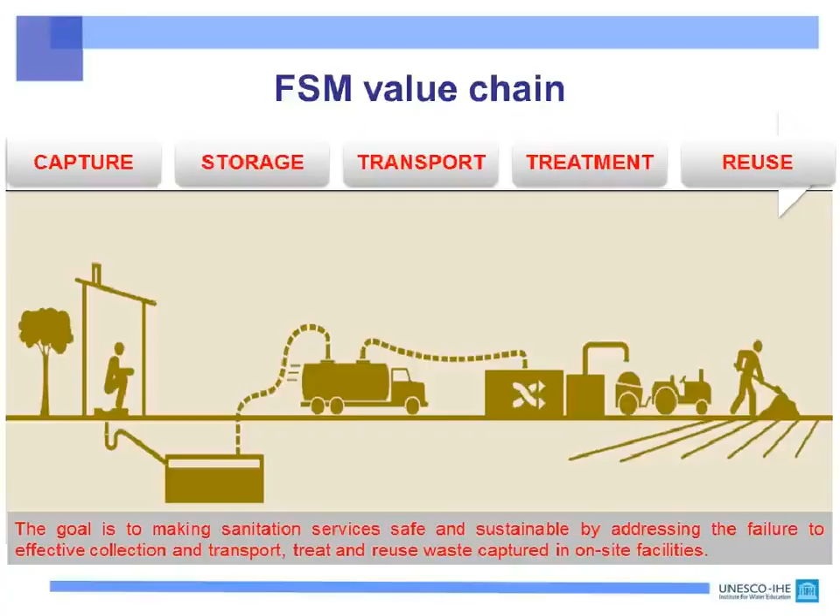For this lecture, we will talk about fecal-sludge treatment technologies. I would even say fecal-sludge pre-treatment technologies. Why pre-treatment technologies? Because we realized that after the processing by drying bed, by settling tank, by planted drying bed, we realized we need a post-treatment. It is why I prefer talking about fecal-sludge pre-treatment technologies.

For an hour and more, we'll talk about drying bed, about planted drying bed, and about settling-thickening tank. What are the main mechanisms we have in these technologies: in settling tank, in drying bed, and in planted drying bed?

We realize that many treatment systems for fecal-sludge are based on systems for wastewater treatment and treatment of wastewater sludge. This is a big mistake because we realize that fecal-sludge and wastewater are not the same. I will talk a little more about that in my next slide.

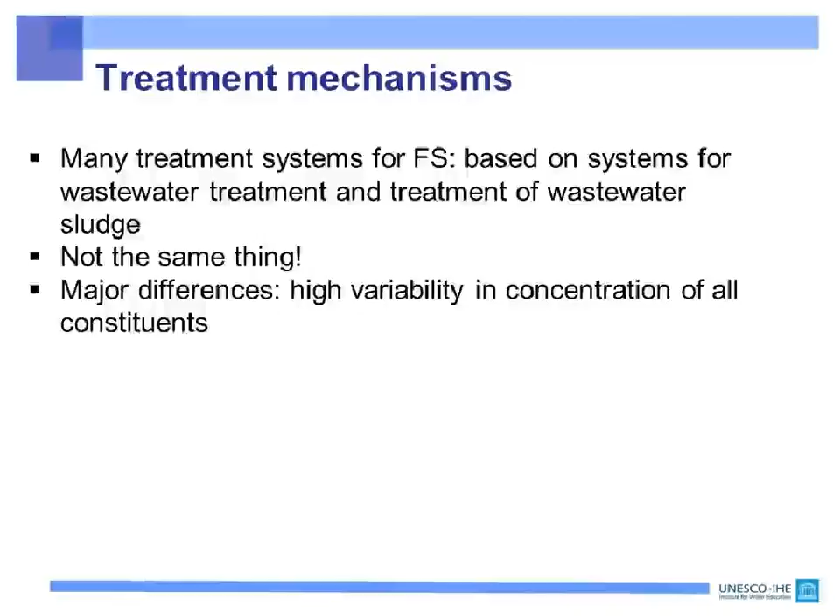We can find major differences between these two kinds of waste due to the high variability in concentration of all constituents. Fecal-sludge is very different from wastewater in terms of volume, concentration, and therefore in terms of charge. Several analyses and measurements made in several countries allow us to understand that 1 liter of fecal-sludge equals 100 liters of wastewater.

It means you cannot use the same system to treat fecal-sludge and wastewater. The design of a fecal-sludge treatment plant needs a lot of analysis due to the high variability that characterizes fecal-sludge. Both within a country and between two countries, you realize that sludge varies widely.

You cannot use, for instance, data from Ghana to design a fecal sludge treatment plant in Dakar. This is a mistake. For instance, in Ghana, where you have public toilets, you realize after measurement that fecal sludge is very different from a country like Senegal, where facilities are residential and consist of septic tanks.

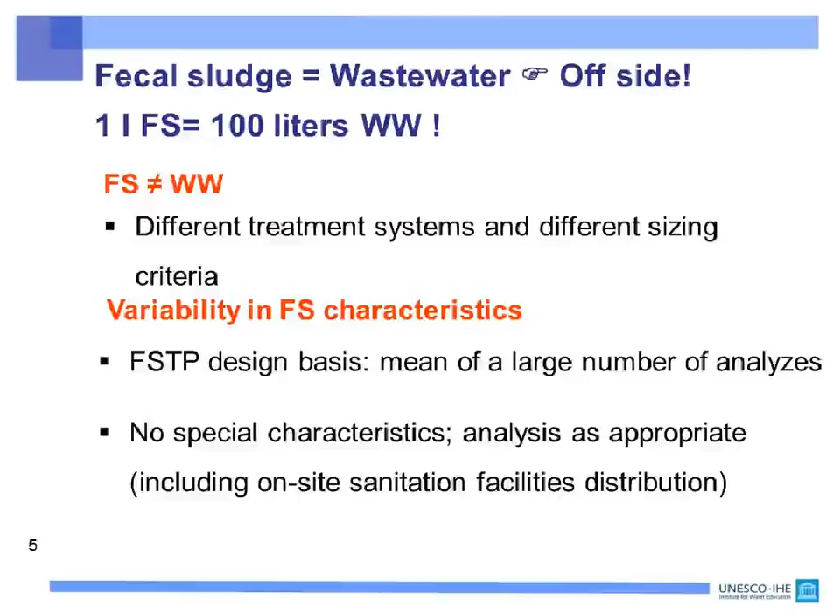Fecal sludge management characteristics depend on several parameters, and depending on the technologies used for collection and transportation, sludge can vary widely. If you want to implement or design a good fecal treatment technology, you have to keep in mind several parameters. I'll talk about the degree of stabilization.

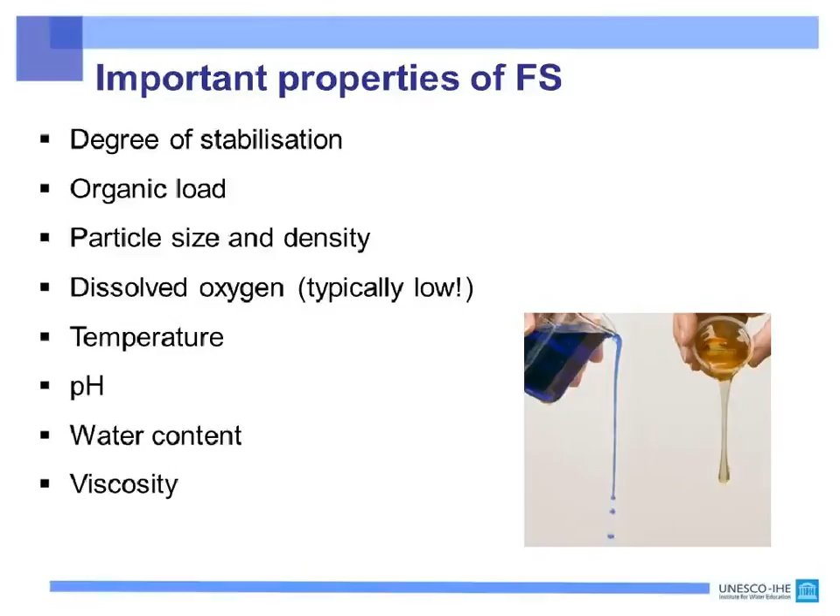You have to link this to the kind of facilities at the household level, because whether you have a latrine or a septic tank, the degree of stabilization will be very different. The organic load is also very important, because it can inform about the kind of post-treatment we have to implement after the settling tank and the drying bed. Also, the water content is very important, because it can inform about the solid-liquid separation treatment needed to improve the quality of this water.

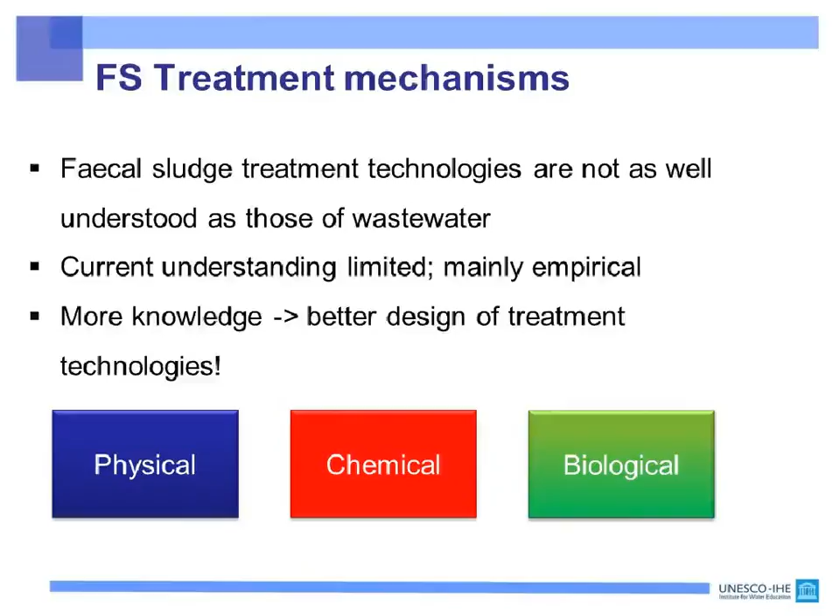Fecal treatment mechanisms are of three types: physical, chemical, and biological. We must know that fecal treatment technologies are not as well understood as those of wastewater. The understanding is very limited, and the design of this technology is based mostly on empirical data. This is why we need to gather more evidence for fecal treatment plant design. Fortunately, several international institutes like EAWAG, the Swiss Federal Institute of Technology, IHE, AIT in Thailand, and utilities like ONAS work on this in order to get more evidence for the design of fecal sludge treatment technologies.

About physical treatment, what is the objective? The objective is just to allow solid-liquid separation in order to reduce the volume of water. This leads to a dewatering process, because dewatering is very important in fecal sludge, since fecal sludge has more than 95% water content, and you cannot dump this waste with this water. This is why the first thing to do is dewater, and this can reduce the transportation cost of the waste. When you dewater, you also disinfect.

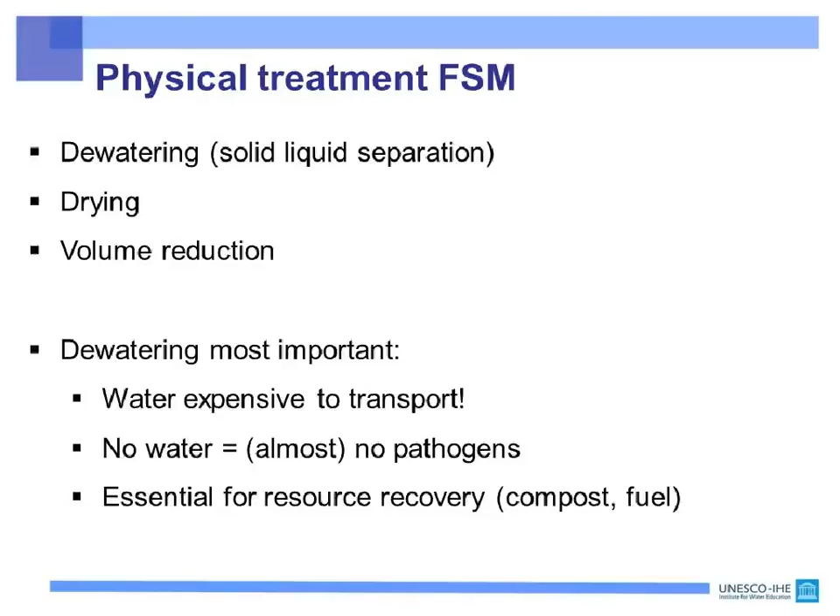You can reduce the quantity of pathogens in this water. It is also essential for resource recovery, because after dewatering you get a solid fraction and a liquid fraction. The solid fraction, when treated correctly, can be used as compost for fertilizers, and the liquid can be used in agriculture or market gardening, which is very important in developing countries.

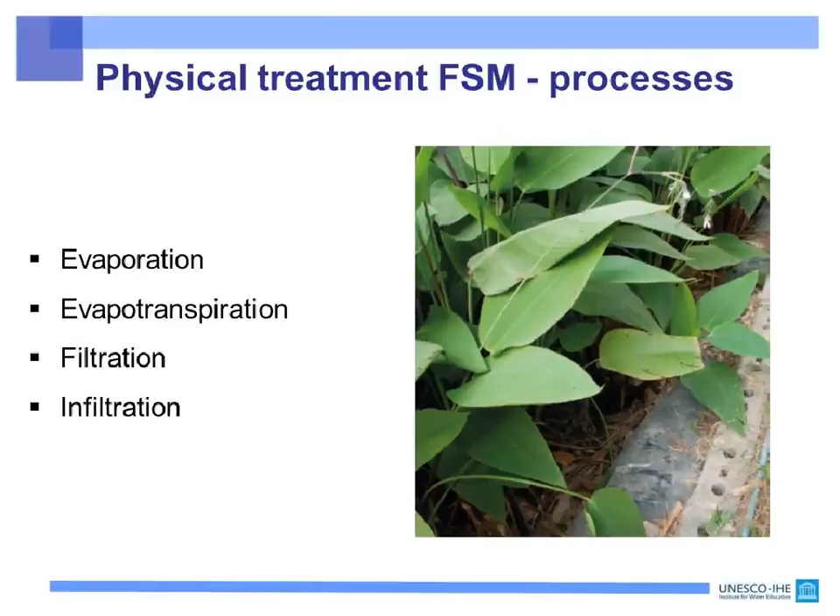What processes are inside this physical treatment? You can use several kinds of processes: evaporation, evapotranspiration, filtration, and infiltration. All these will allow reduction of the volume of liquid to dewater, and these processes play a key role in the dewatering process.

About chemical treatment: coagulation and flocculation are important processes in water treatment. With coagulation, you destabilize particles through a chemical reaction between coagulant and colloids. Colloids are particles in fecal sludge with very, very small density. With flocculation, these destabilized particles are transported and made to settle. The objective of chemical treatment is to improve the performance of physical treatment and to inactivate pathogens. However, we have to keep in mind it can be very expensive, because you have to use chemicals like alkaline, like ammonia, which increases the cost of treatment.

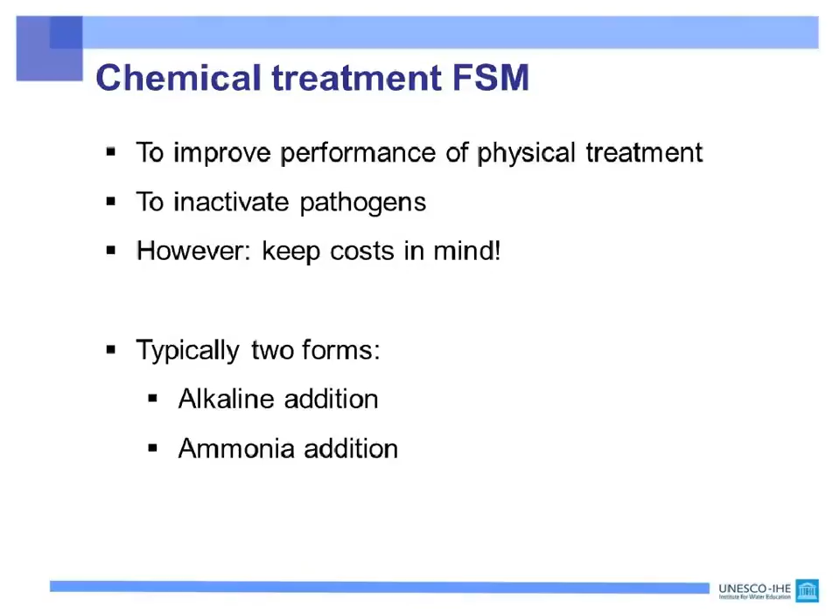Biological treatment is another process involved in treatment technologies, and this can be aerobic or anaerobic, with the main objective to stabilize. But after physical and chemical treatment, we realize the quality of the treated water is still very low. There is so much nitrogen, so much phosphorus, so much pollution, and so much pathogen inside.

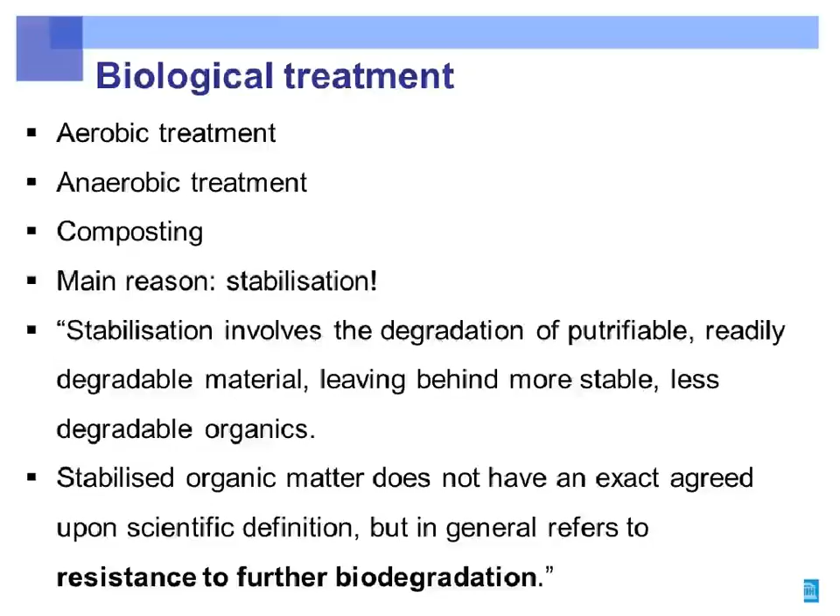It is why it is obvious to develop further treatment in order to reduce the organic content and eliminate pathogens. This is why stabilization is something very important. Stabilization involves the degradation of putrefiable, readily degradable material, leaving behind more stable, less degradable organics. Stabilized organic matter does not have an exact agreed-upon scientific definition, but in general refers to resistance to further biodegradation.

To summarize, several mechanisms are involved in fecal sludge treatment. We have physical treatment with settling, thickening, evaporation, evapotranspiration, infiltration, all leading to dewatering and a reduction of water content. After that, chemical treatment with coagulation and flocculation aims to improve the dewatering or solid-liquid separation already in place at the physical treatment stage. But don't forget chemical products can increase the cost of treatment. After that, you need to improve the quality of both the liquid and solid fractions, since they contain so much organic matter and pathogen, by conducting biological treatment.

This biological treatment can be done by plant uptake in planted drying beds, by aerobic degradation, by anaerobic degradation, and also by aeration thanks to the plants implemented in the drying bed.

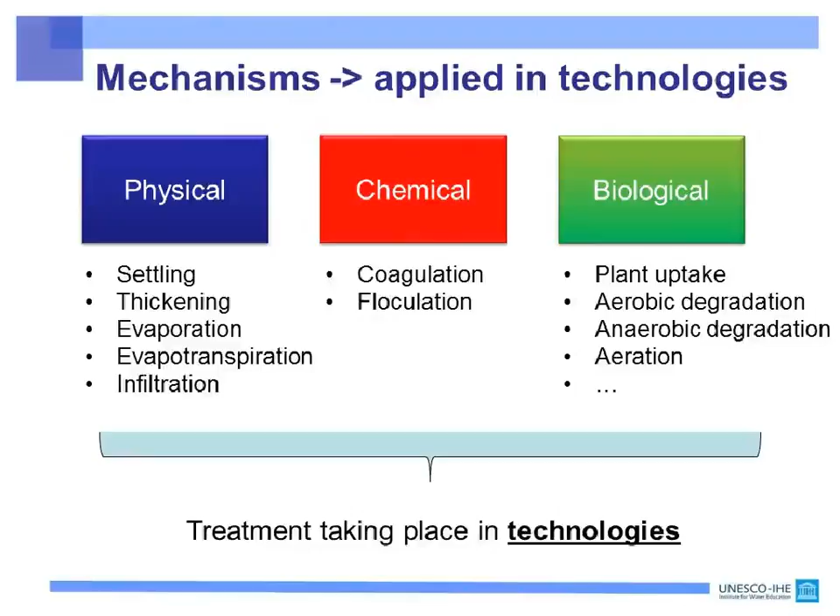What are the main factors influencing the quality of fecal sludge? Why is fecal sludge so different from Dakar to Accra, from Accra to Bamako, and from Bamako to Thailand, for instance?

It is very different because the technology and the emptying mode are very different. If, for instance, in the country you deal with manual emptying or with mechanical emptying, you realize that the quantity of solid inside the fecal sludge will be very different. In manual emptying, emptiers can mobilize all the fecal sludge, while in mechanical emptying, sometimes only the liquid part is pumped.

In Dakar, for instance, we have 150 trucks working every day to empty the fecal sludge content of the pits, but we realize that 60% of these trucks are pumping trucks. When you have a pumping truck, it can pump only the liquid, because the pump is not strong enough to mobilize the fecal sludge. It means at the fecal sludge treatment plant you have very liquid fecal sludge, because all the solid content remains inside the pit. This is why, according to the kind of technology you have in your country, it can impact the quality of fecal sludge you have.

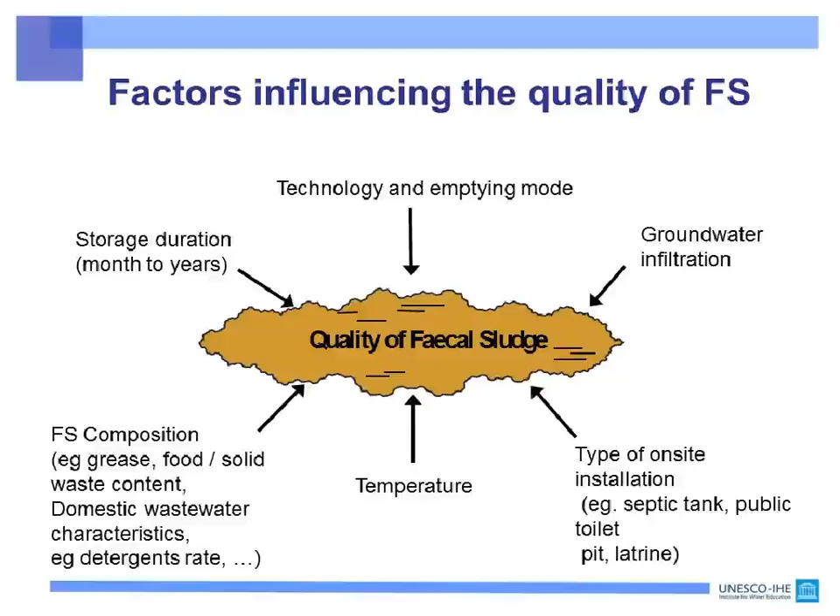Fecal sludge may also contain things like sand. You can also have solid waste like clothes, broken bottles, batteries, bags, plastic bottles, metal, syringes. You can also have pharmaceuticals, chemical pollutants from craft industry, oil, dyeing effluent, and so on and so forth. This waste looks like garbage.

This is why, if you want a good fecal sludge treatment system, you need to do good screening before treatment. Screening is very important, and you also need to put in place a good organization to transport this solid waste to a landfill. If your only concern is to treat fecal sludge, you realize there is some garbage alongside it that you need to take care of.

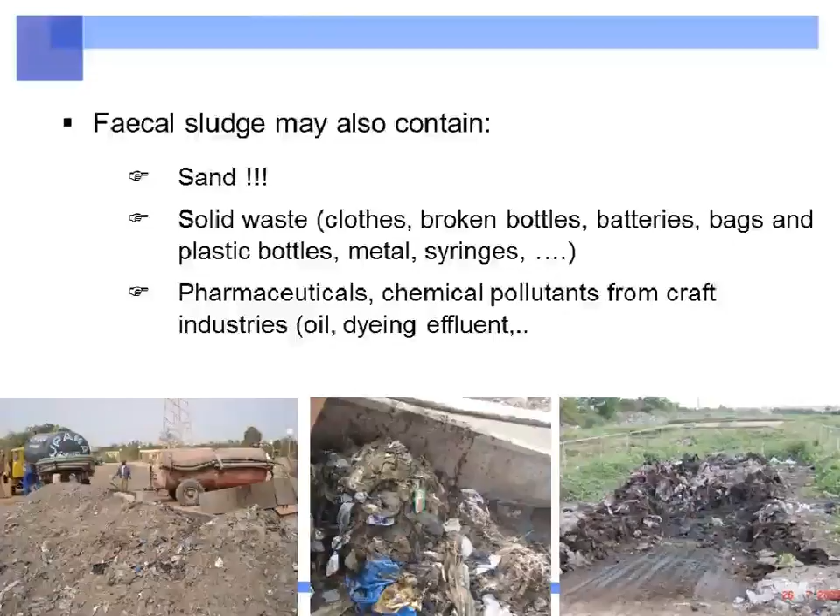Dakar's experience shows that a succession of 2 grids before the settling tank or before the drying bed is very important. If you put 2 grids with a respective bar distance of 20 millimeters and 25 millimeters, you can eliminate a big part of the solid waste. But you need to clean these grids every couple of hours to remove all the solid content you manage to eliminate, and send this waste to a landfill. This is why the success of a good fecal treatment plant can only be achieved through a good system of screening. It is something very important.

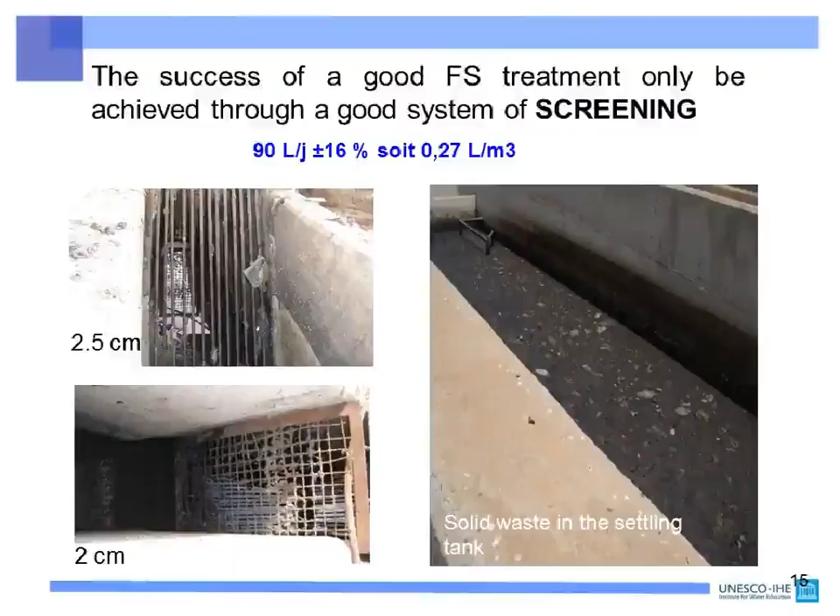What kind of treatment technologies after the screening process do we implement to improve the quality of fecal sludge? Several treatment systems are used in fecal sludge management: co-composting with organic solid waste, planted drying beds, unplanted drying beds, settling tanks, settling ponds, anaerobic digestion, and co-treatment of fecal sludge with sewage sludge or wastewater.

We have to keep in mind that all these systems generate both a solid fraction and a liquid fraction, and these need to be further treated to improve their quality. This is why in the beginning I talk about pre-treatment technologies, not treatment technologies, because after the drying bed or settling tank, you always need a post-treatment. When these fractions are post-treated correctly, you can use the solid fraction in agriculture, use the water for irrigation, or use the solid fraction as fuel, as we plan with the omniprocessor in Dakar, working with the Senegal National Sanitation Utility to use this fraction as fuel for a cement factory. This post-treatment is very important because it creates added value from the fecal treatment technology.

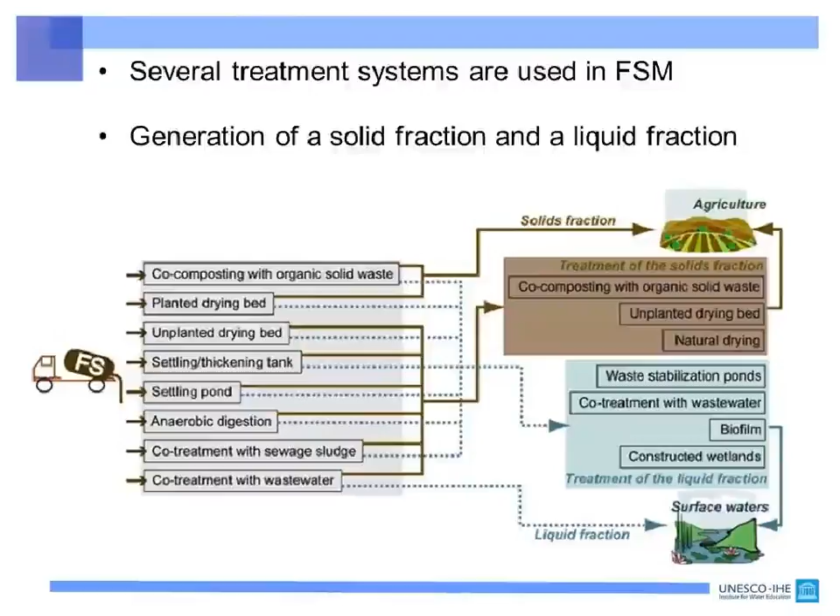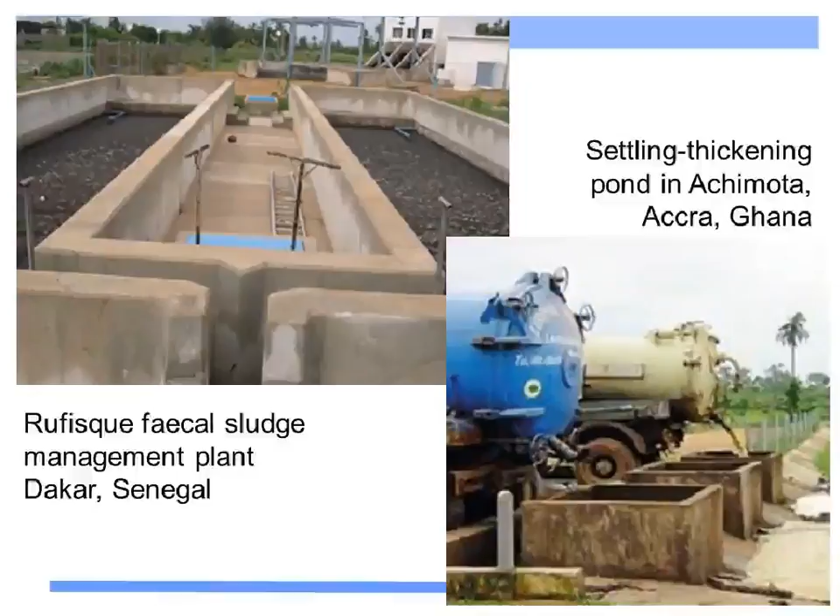Now let's talk a little about the settling-thickening tank, the first technology we deal with in this course. This picture illustrates a fecal treatment plant in Rufisque, near Dakar, the capital of Senegal, and in Accra, Ghana. All these systems are working properly right now.

What about the settling-thickening tank? We realize that this fecal settling-thickening tank works like a big open septic tank, with a short residence time and solid-liquid separation, which allows the formation of several layers: a solid layer at the bottom, a water layer, and a third layer with grease, called scum.

The settling process that begins immediately after feeding the bed is followed by a longer thickening process, resulting in more compact fecal sludge. But we need to pay attention, because a long thickening time undermines effective pumping of thickened sludge to the drying bed. It's why you need to be careful about this. In Dakar, for instance, after one week of feeding the bed, we can have one to two weeks of thickening to get more compact fecal sludge, which we then transfer to the drying bed.

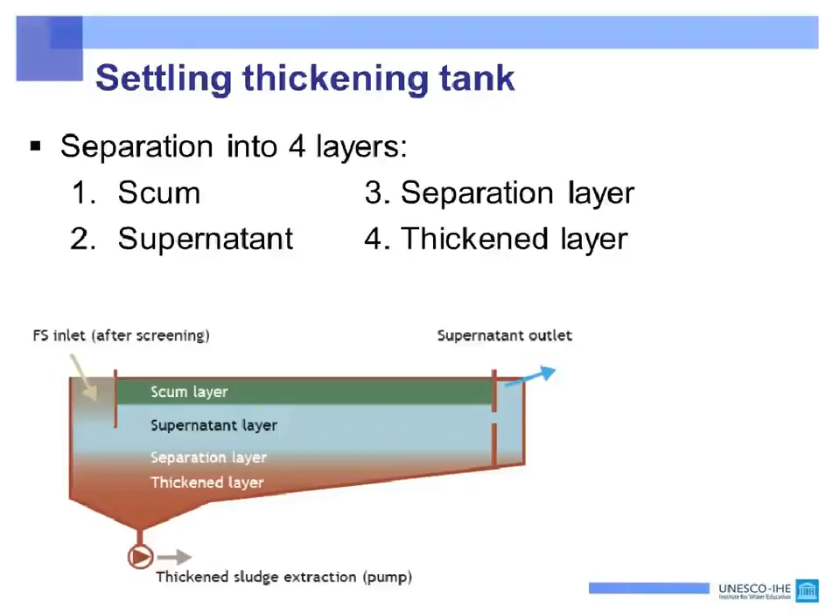We conducted several sedimentation tests in Dakar and Accra, and realized that the volume of settled sludge can be roughly 30-35% of the initial volume. We also realized that public toilet sludge does not settle easily because it has too much bound water.

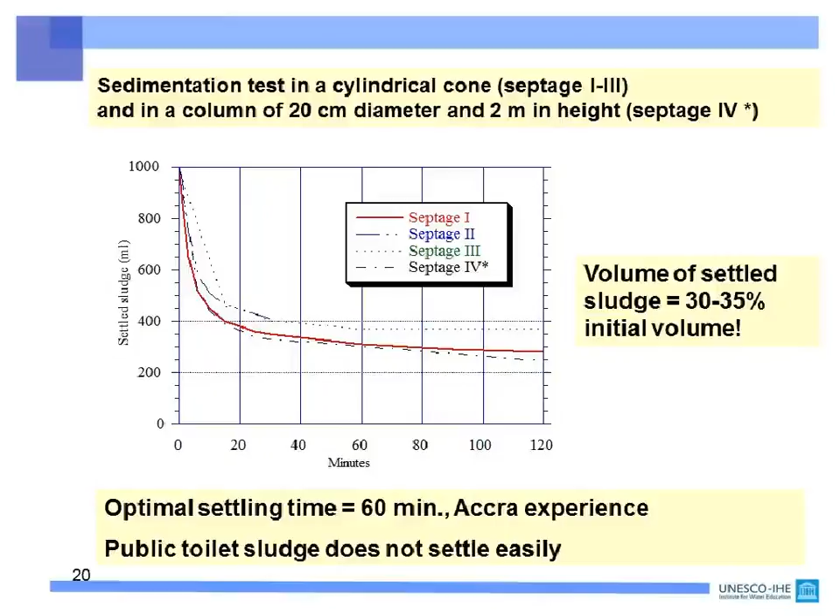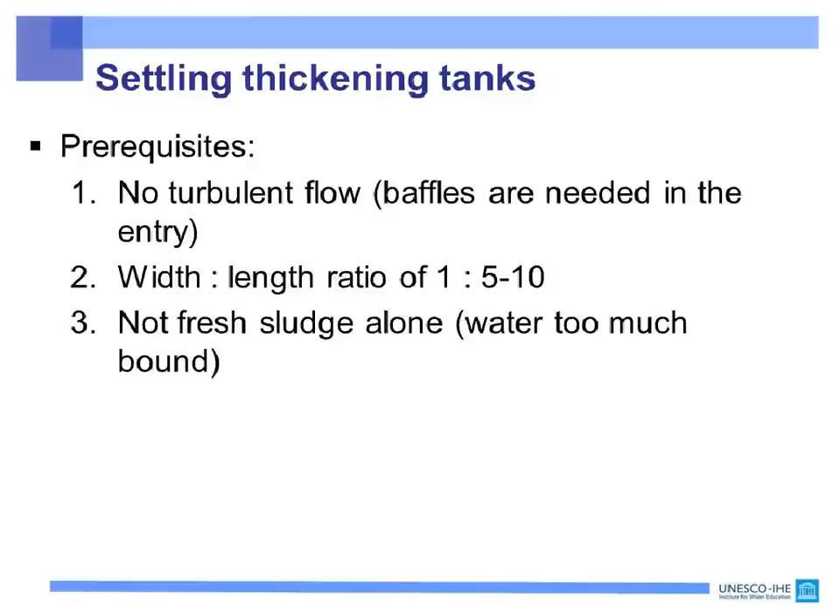To have a good settling thickening tank working properly, you have to avoid turbulent flow as much as possible. This is why we implement baffles at the entry of the settling thickening tank. The ratio between width and length can be 1:5-10. And as I explained earlier, not fresh sludge alone - you need to mix this fresh sludge with more stabilized sludge to make it settle easily.

Normally we have two settling thickening tank units operated alternately. The performance of the settling tank depends on the operation mode. As I explained, one week of loading is sufficient, and after that you can have two weeks of thickening in the settling thickening tank to make the sludge more compact.

You have some issues when processing fresh sludge because of poor sedimentation. We realize that in several African cities, you have many public toilets, and in these public toilets you get fresh sludge. This is why we have to think more about the treatment of this sludge.

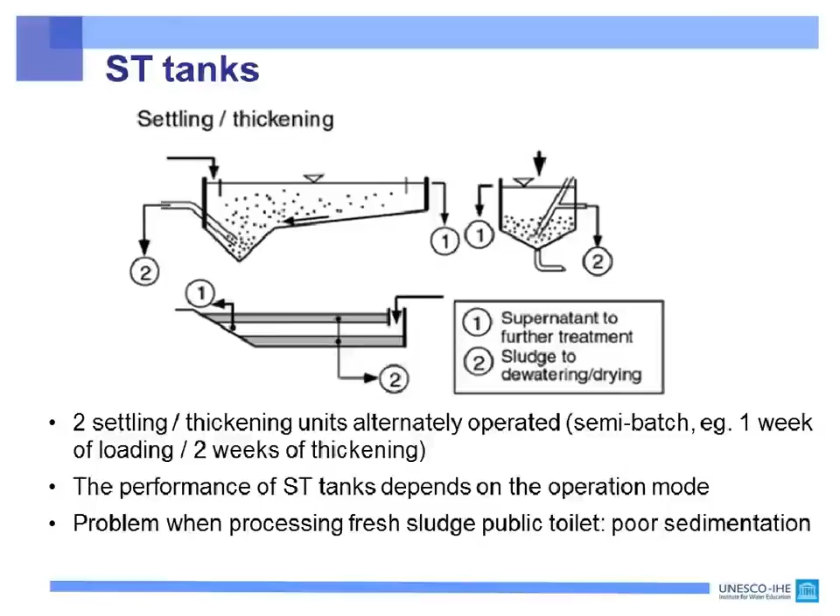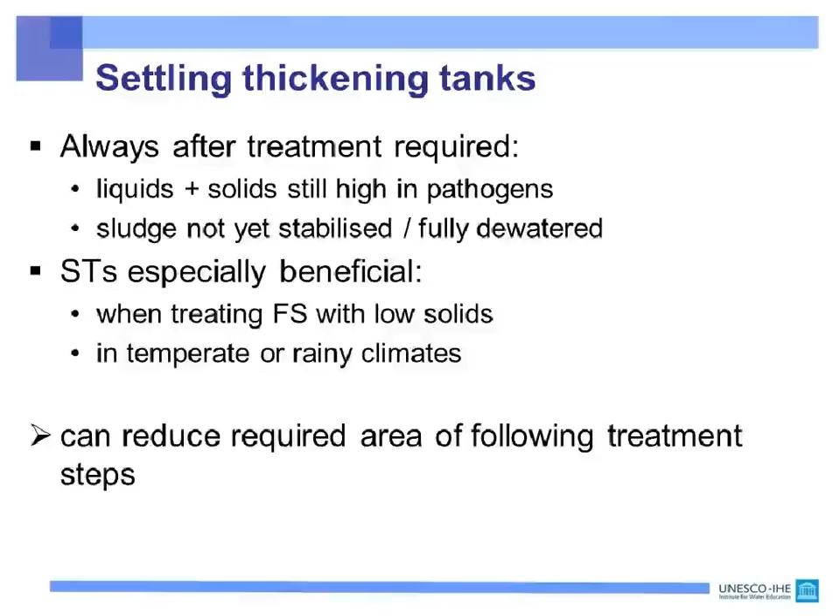In the post-treatment aspect, we can use a stabilization pond, which is something very important, but it allows very low maintenance because we have some concerns with this technology, since we need so much area for its implementation. The footprint is so high with the stabilization pond, and this space is a big issue in cities, in developing countries. Also, a major problem is it is difficult to treat fresh sludge with a stabilization pond due to the high concentration of ammonia we have inside.

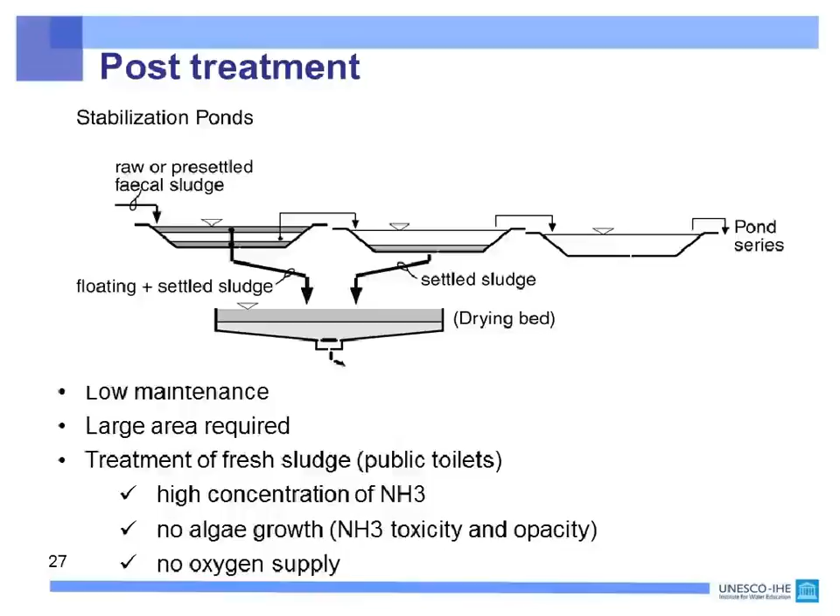We need to operate a good settling thickening tank. We need sufficient volume for sludge accumulation, and also a sufficient depth, more than 1.5 meters. A loading-resting cycle much shorter than in a sedimentation pond, where we have several months for this resting cycle. We need a baffle in order to make the basin less turbulent and to allow good settling and thickening of the sludge, and also good retention of floating scum.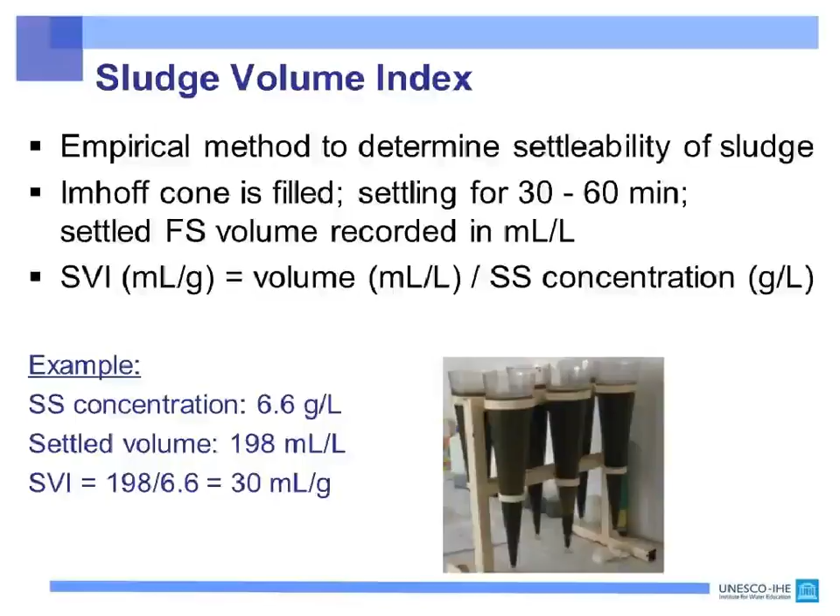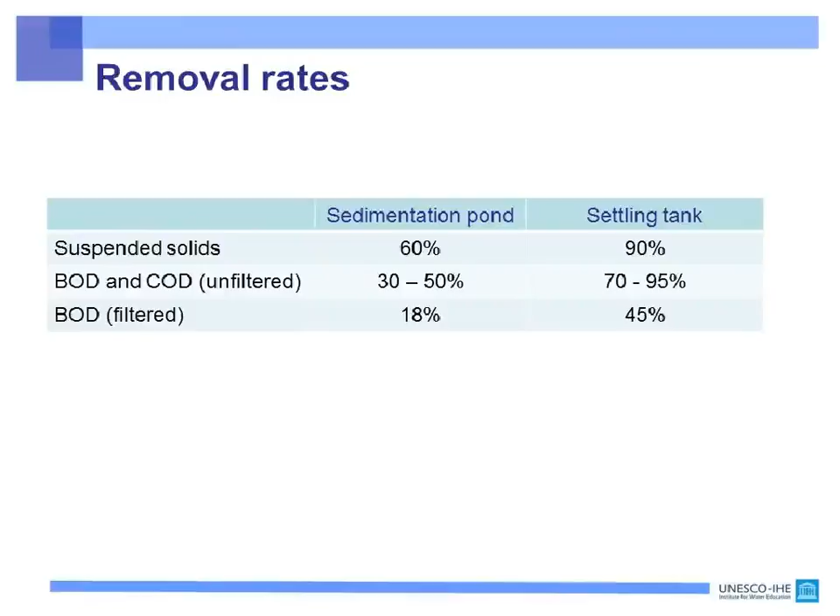What about the removal rate? We try in this slide to compare what happens in a sedimentation pond versus a settling tank, and we realize that according to the physical pollution and the organic matter, the settling tank is working correctly. We can have more than 90% retention of the suspended solids, and the organic matter is also correctly retained due to the fact that this organic matter is mainly solids. In this condition you can eliminate between 70 to 95% of this organic matter.

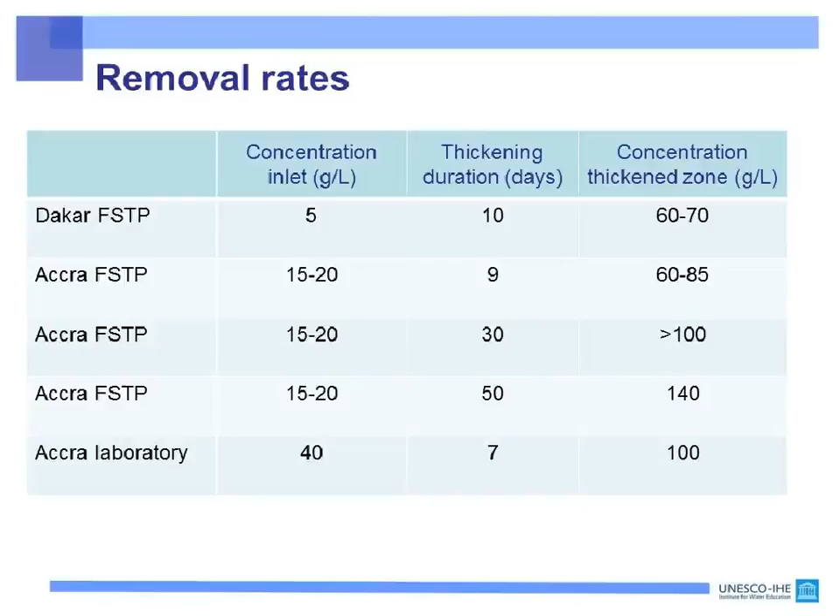We also compare several treatment technologies from Dakar to Accra, and we realize that this technology is very efficient. When you have a long thickening time, you can improve the quality of this water, but you will face several difficulties removing this sludge from the tank. You have to balance between this thickening time and the objective to pump this sludge into the drying bed.

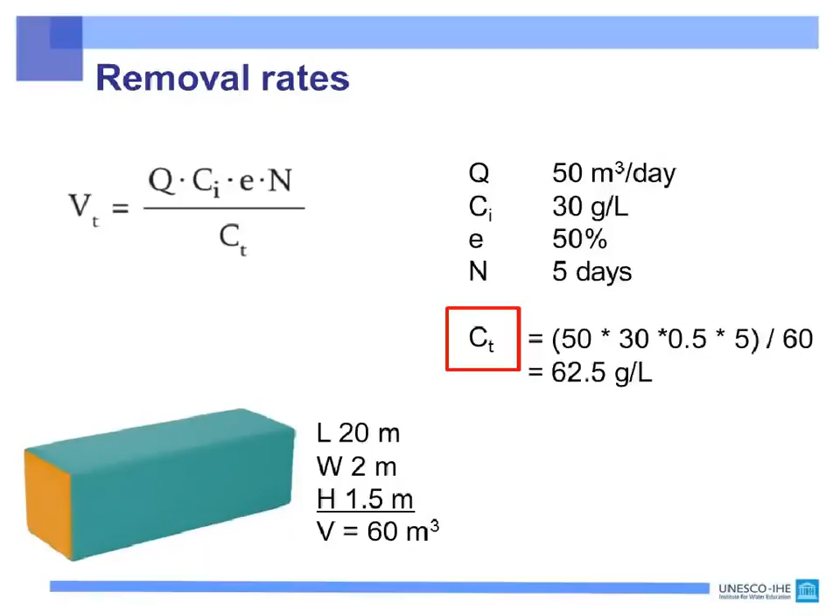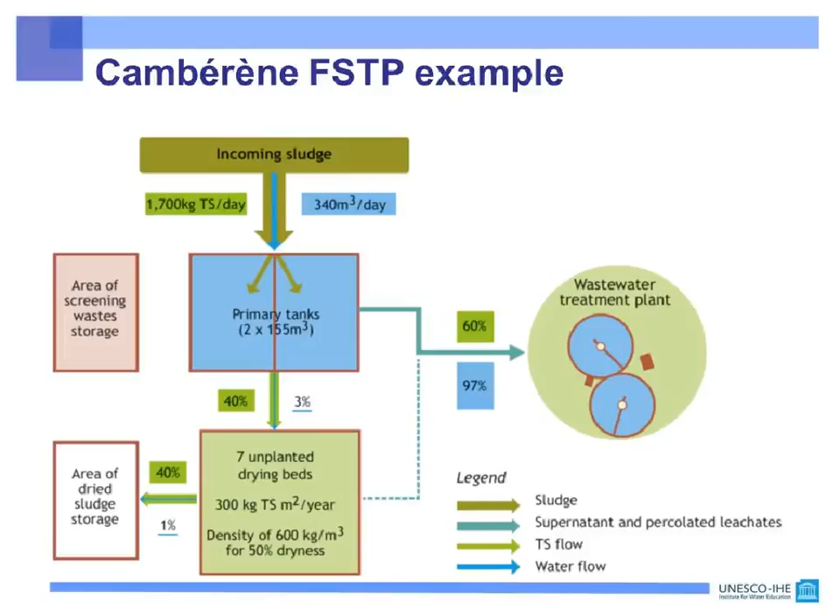You also need an area where you can store the dry sludge coming from your drying bed. A long storage period can improve the quality of this sludge and can allow all kinds of reuse of these dry solids.